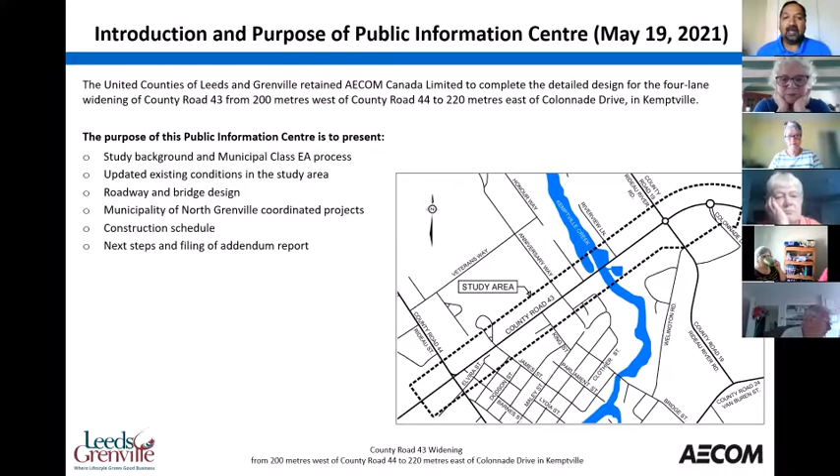What I'm going to go through today is give you a little bit about the study itself, talk a little about the road design and the bridge design across Kemptville Creek that you see there in blue, give you a hint of what the construction schedule might be, and then tell you a little bit of what's happening next.

By way of background in terms of this project, it's been going on for a fairly long time, well before 2010. There was identified a need, and we're long past, in my opinion, the need for changing this road. As I said, communities change and grow, and this road served a purpose back then as a two-lane rural road going through a community with ditches and a very rural character. But that need has changed over the years as development and growth occurred in North Grenville.

So well before 2010, the study got initiated. In 2010, what I was referring to as the Municipal Class Environmental Assessment was completed, submitted, and got approved. At that time, there was also approval to keep the existing bridge across Kemptville Creek and build a new two-lane bridge, and I'll talk about that in the next slide, a little bit about the time lapse.

So obviously between 2010, when the project was approved, and 2020, 10 years have passed. A number of conditions have changed, from an environmental point of view and a socioeconomic point of view. In accordance with the process laid out, usually when you complete an environmental assessment study report and it gets approved, that's your green light to go ahead and start construction.

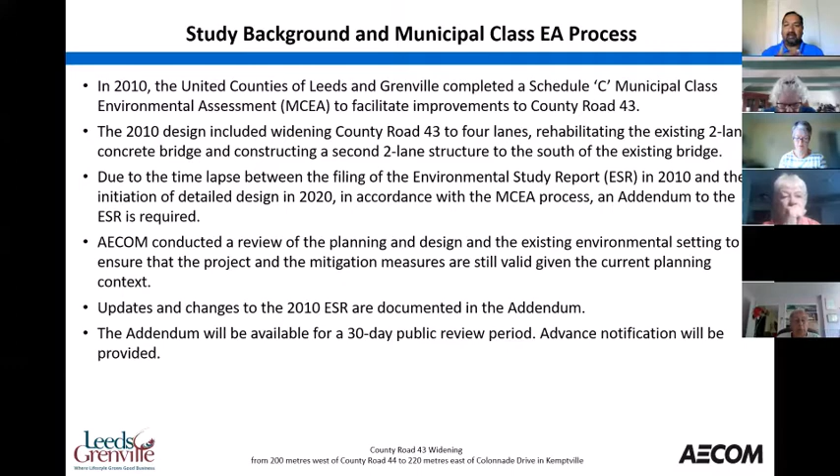And so of course, before you could put shovel into the ground, you had to do this addendum, which meant you had to document the changes over the last 10 years, go through a public process, which we did at the public meeting, and then present the results.

So one of the main things that's changed was the bridge structure at County Road, or at Kemptville Creek, County Road 43, obviously in Kemptville Creek. You're all familiar with the bridge there, right where Stinson's is.

Imagine, more than 10 years ago, because the studies, even though the environmental assessment was actually approved in 2010, all of the technical information was done a little bit before that. So you can imagine that 10 years have now elapsed between when the technical studies were done on that existing bridge, and we wanted to make sure, so we did a fair bit of investigation on the current bridge.

Including some underwater investigations. If you understand the bridge, it has piers or abutments, and those extend right down, they go underneath the water. So through the consultants, we actually went under the water, checked the condition, did a full inspection of the bridge. And not surprisingly, at the time the study was done, the logic of keeping the 2-lane bridge and building a brand new one on the south side made a lot of sense, because at that time, the condition of the existing bridge was relatively good.

And then one would have thought back then, if you'd built the project then, you would have gotten another, and we felt at that time there was comfortably another 10 years worth of life in the bridge. As you can see, it was built in 1955. Well, 10 years later, we couldn't say the same thing.

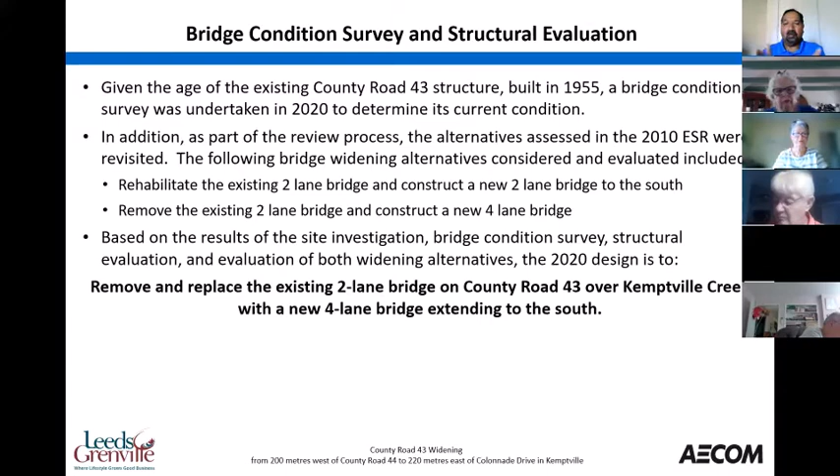That, along with a number of other changes, resulted in the need to kickstart an addendum to the environmental assessment, so we didn't have to do a whole brand new one. The process allows you to focus on the specific changes, which is why this is called an addendum to the 2010 study. I wanted to give you a good picture of what an addendum is, what an environmental assessment study is, and why we're doing it. Hopefully those slides gave you that overview.

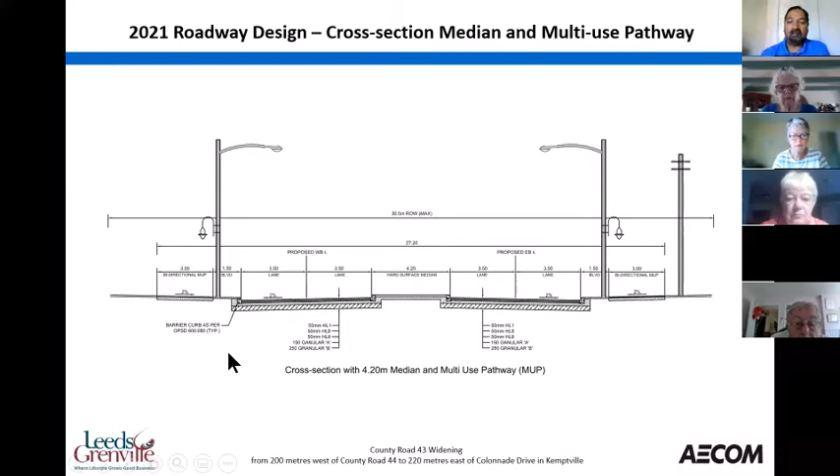As you plow a 2-lane road, you need to put the snow somewhere, and then you move this over to what we call a bi-directional facility—the term is MUP. Engineers are notorious for acronyms; it's really just a multi-use pathway, combining the sidewalk and pedestrians into one facility.

That was also an important decision—do you build it on both sides or one side? We decided it was important to make this investment on both sides. So that gives you a bit of a visual.

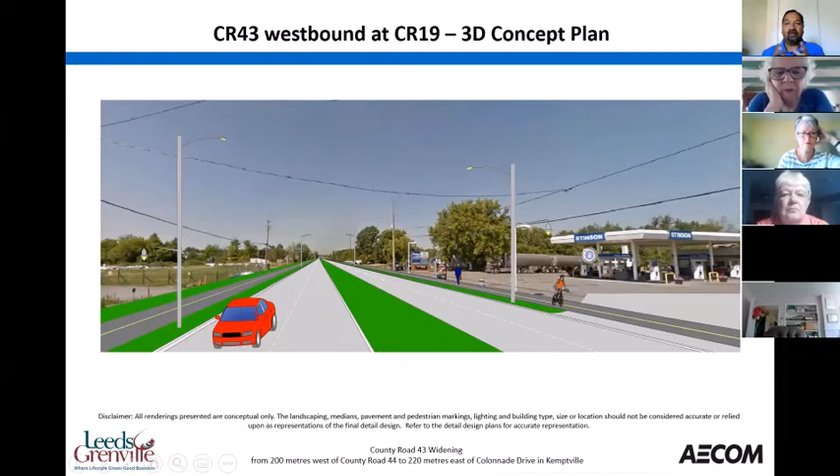There's some better renderings coming up that will give you a clearer picture. Now, another option here—across where the dairy barn is, we have a number of driveways in close proximity, with a number of businesses on the south side of the road.

Rather than having a median there, we're considering a 2-way center left turn lane at this point, so people can turn in and out of the businesses. This particular section is fairly short, from the dairy barn to the west.

Unlike the other sections, where you'll see a number of roundabouts being proposed—the intention is that even though there's a median, you'll be able to turn, go around the roundabout, and continue in the other direction if you wish. So the roundabouts play a role in providing access to those businesses.

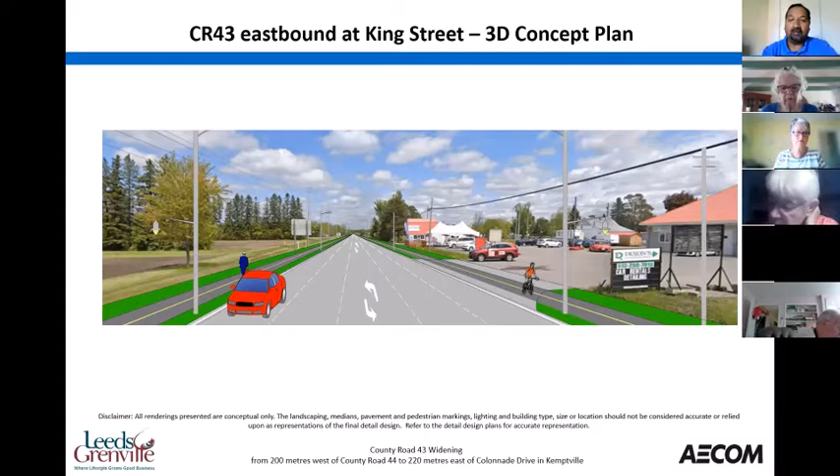In this section, because the roundabout is quite a ways down at Anniversary Way, where the Ferguson Forest entrance is, we felt there was an opportunity here to keep it open and break it up to move along. We did get some commentary about this, and hopefully I'll hear some from all of you as well as we go along.

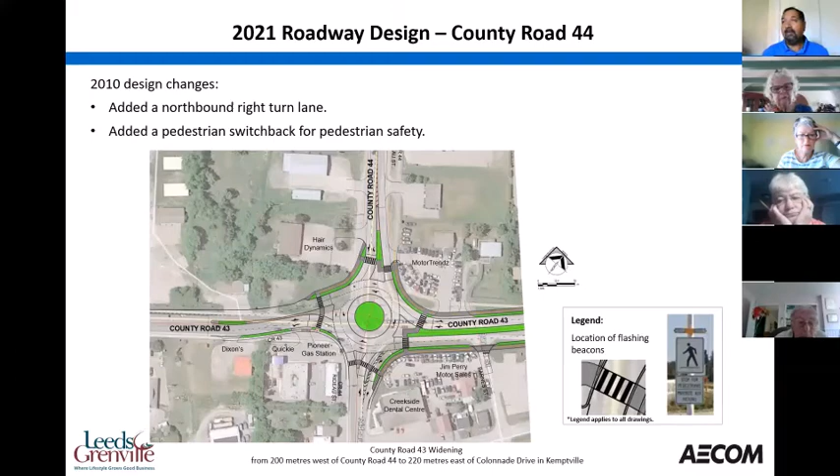Before the Class EA started, there was also an envisioning exercise done for what we want County Road 43 to look like. In that process, this was identified as a roundabout corridor, and that's why you have the roundabouts there today—there was a vision to accommodate things with roundabouts, a roundabout corridor. We've continued that vision in this next design exercise.

So this is a different perspective. Here you're looking north—Jim Perry Motors is here again, MotorTrendz is here, I think it's called Pioneer now, and there's some wonderful pizza and wings at this little place if you haven't been.

You can see how we built in these pedestrian crossings in the roundabout—this is what's known as a two-stage crossing. We put them on the main roadways, and those walls won't be nearly as high as shown here. As a pedestrian, you only have to deal with traffic coming from one direction—no left turns, right turns, nothing. You face traffic in one direction and cross the road. We've designed the switchback so that as you turn, you'll be facing the traffic coming towards you, forced to look at it, then cross another two-lane section.

These aren't shown here, but these crossings will also be outfitted with pedestrian crossing devices—like over by the municipal center, with flashing lights, beacons, and a set pedestrian signal. You press the button for traffic. Some people ask how that affects the operation of the roundabout, but as long as it's set back far enough, with only two lanes of traffic, it doesn't delay vehicles that long.

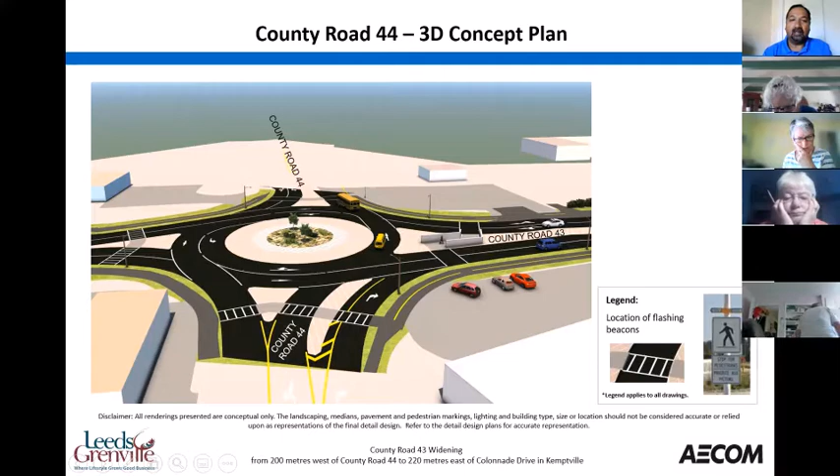So this is what I was talking about—those walls will only be about a foot high, just to provide some delineation. Whether you're walking or crossing with a bicycle, this is what's being proposed for going across the roundabout. It's a switchback design, and by providing these walls and extra illumination, you really bring attention to that intersection so motorists know what's happening there.

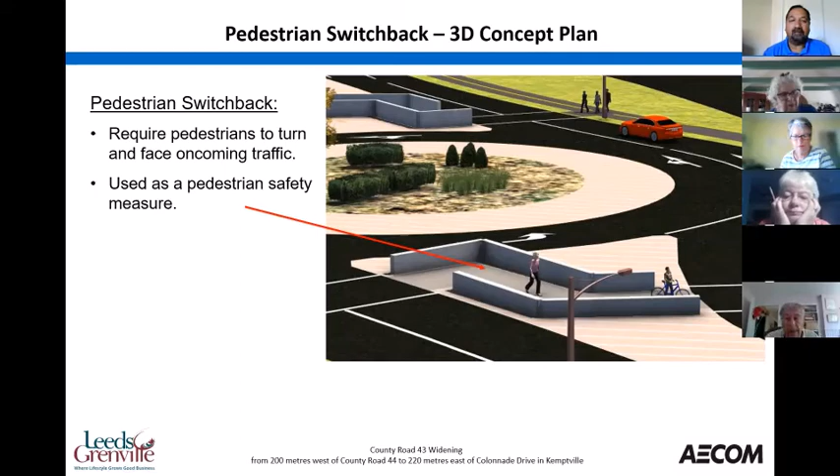So then we move on to the next intersection.

Throughout this graphic, you can see the aerial photo, so you can pick up some features in the background. You can start to see this green median down the middle, and on each end of the roundabout, in certain portions, it provides another opportunity to break up the asphalt. We're still to determine through conversation with North Grenville as to what's going to be in the middle there.

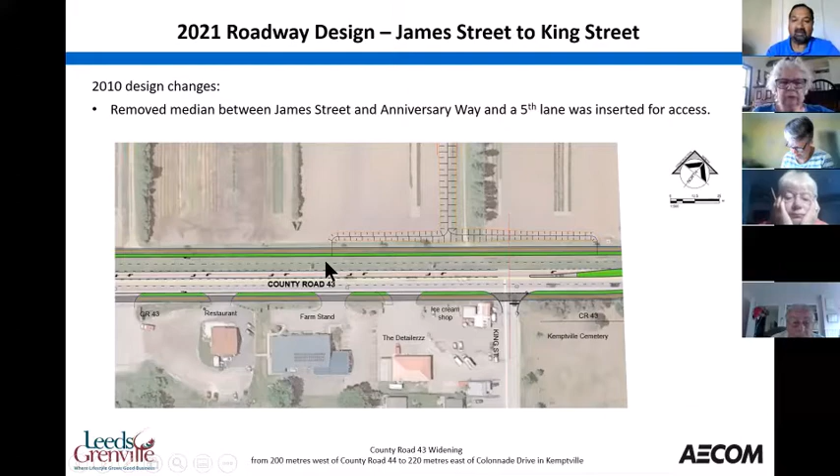So then we get to Anniversary Way. You have your cemetery right here, the Creekside Centre Plaza, the M&Ms here, I think Little Caesars is over here. If you picked up a theme of mine, it's always centered around food - I seem to know where all the good eating establishments are. So those become my landmarks, like the Dairy Barn with its ice cream and chips, et cetera. Just a weakness of mine, but we're pretty lucky to have some of those options available to us in this community, aren't we?

So here's the cemetery, Anniversary Way, and this leads into the Ferguson Forest Centre - a number of amenities up there, from walking trails, I believe there's a dog park up there, and a number of other amenities. So this was an important crossing, which is why there's this investment in the switchbacks, recognizing that you have a pretty large residential community to the south and this amenity of the Ferguson Forest to the north. So we've beefed up this pedestrian crossing here.

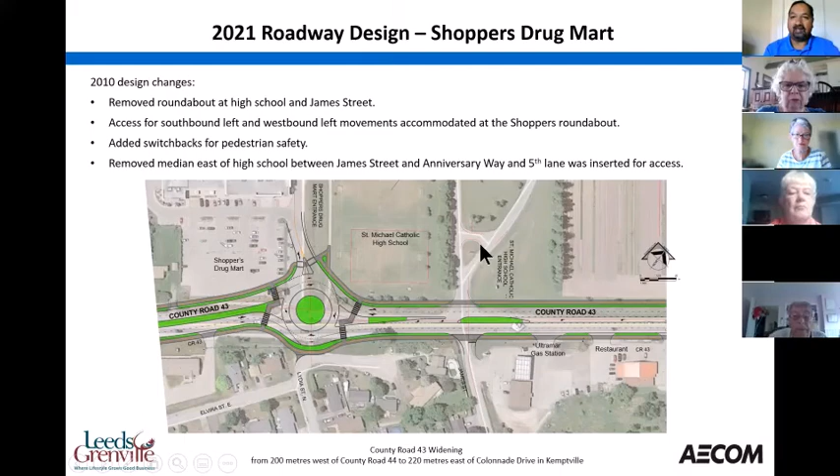I hope that answered the question. I hope you didn't mind me pausing to get through some of those questions, because they were fresh in your mind, and it allowed me to go back and explain that a little bit.

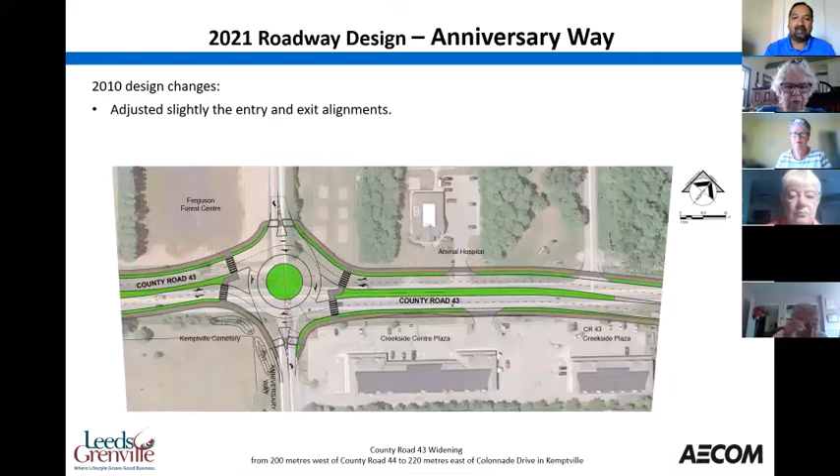We covered off Anniversary Way, which is the extension of Bridge Street - we talked about that. Then this is the Stinson entrance, aligned with the seniors home, which provided another opportunity for us where you have a fair bit of volume coming in and out of Stinson wanting to go right and left. We didn't want that to happen across 4 lanes of traffic while also dealing with people coming in and out of the retirement home. So this pulls them all together at the intersection to provide a safer movement.

And then over here you can see Kemptville Creek, where the new 4-lane bridge will be constructed. I'm going to spend some time talking about the construction of this bridge structure, because that's a common question. The beauty of doing this now is that, from a staging point of view, the existing bridge will remain, and a brand new 4-lane bridge will replace it.

The way that gets done is you build the south 2 lanes of the new 4-lane structure, and divert all the existing traffic onto the new bottom half on the south side. Then you close down and tear down the old bridge, and build the north half of the 4-lane structure. So at all times, the beauty of doing it this way is you can build half the bridge, divert traffic to that side while still using 2 lanes, then build the other half of the bridge, and open it up to 4 lanes.

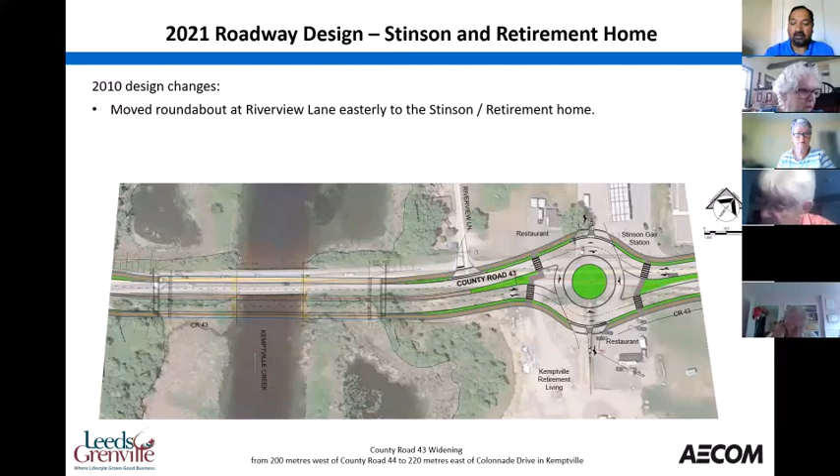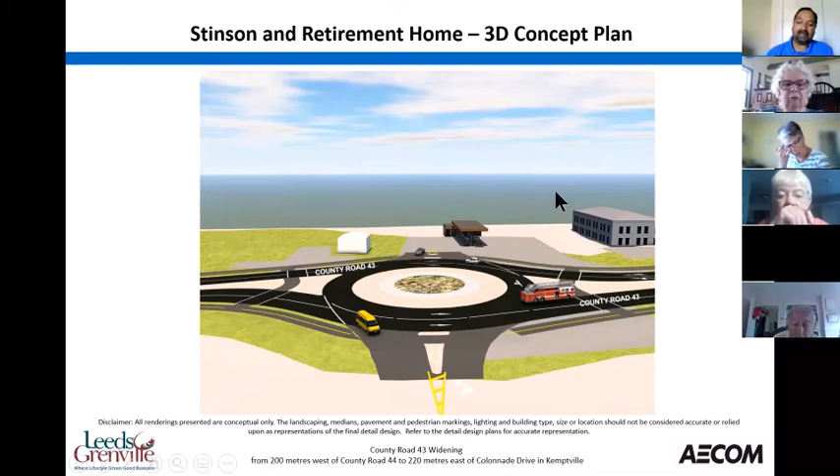I talked about this roundabout already. There's your representation of Stinson's, and this is your retirement home here. Of course, we haven't fully shown what the landscaping is going to look like in this roundabout. We have a fair bit of time to figure that out.

Moving further east, you have County Road 19. Here you have the McEwen gas station, Giant Tiger, KFC, the new Starbucks, and the brand new building going up on that pad right now, or that's actually been constructed. So here, again, this is an existing roundabout. We're modifying it to bring it up to 4 lanes, and then modifying these radiuses.

Now I want to talk about that aspect, because a common comment I hear from people is that traffic is going through the roundabout too fast on 43, and as a person coming in off the side street you have to wait a long time to get into it. The way you manage that is through a specific design feature: the speed of the vehicle coming in, controlled by the angle of deflection coming into the roundabout. If you observe it right now, you don't have much of an angle coming into the roundabout, so you can comfortably go through probably at 40 kilometers an hour, sometimes 50, if not higher.

So through this exercise, when we modify this, you can see there's a bit of curvature identified in the road itself—you dip down and then turn right. The bigger this deflection and angle is, the slower you have to go to negotiate the roundabout. With this new modern design, we're changing those entry paths significantly, not just leaving the roundabout alone. We have to change that entry deflection, and it's not just a matter of dealing with the median—sometimes you have to deal with the alignment of the road and change that coming in so it's very pronounced. By doing these things, you slow down traffic coming in on all the approaches.

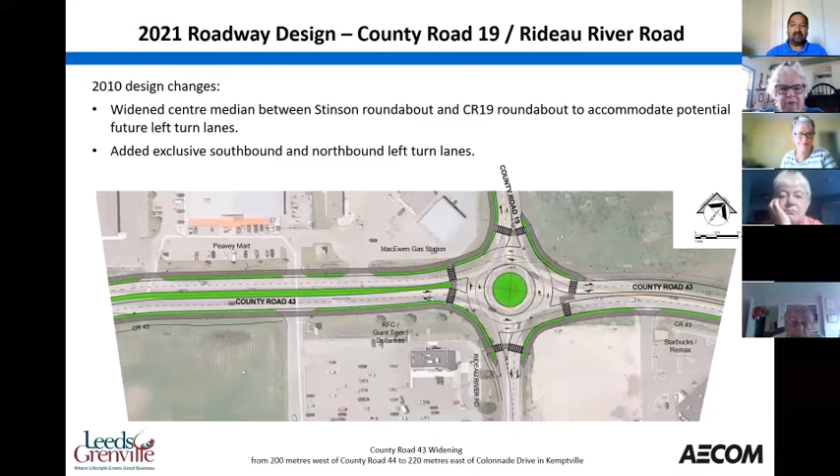When the traffic on 43 has to slow down, that provides more of a gap and an opportunity to enter into the roundabout. This isn't a new novel concept—it's been tried and tested in many municipalities with much higher volumes than you'll see here. So that's the plan on how that's going to work. And then that's a 3D visual.

You see the MacEwen on the northwest corner, and then there's the KFC building there, shown there, and this is the 3D you can see of the roundabout.

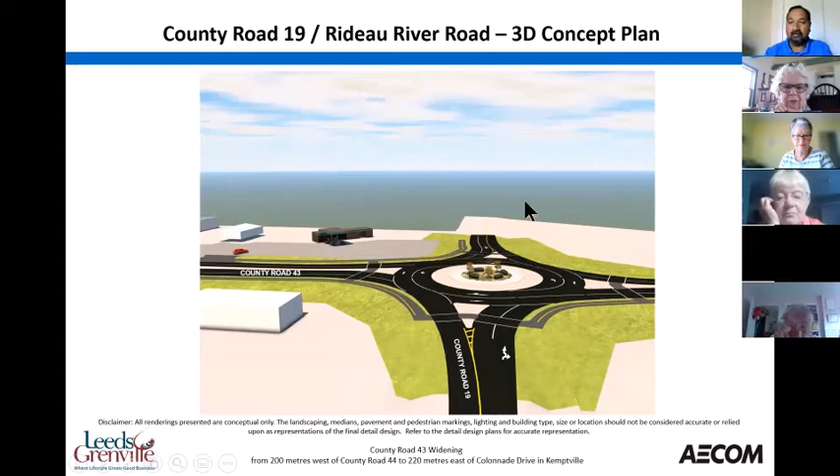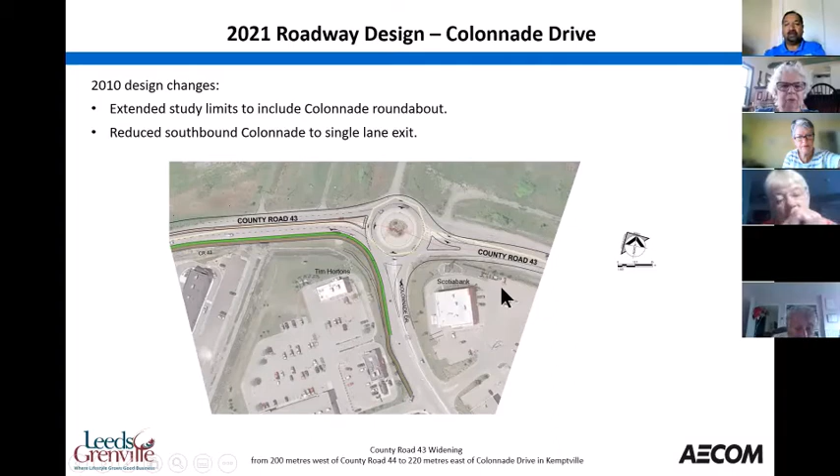And then that brings us to the east end of the project at Colonnade. In this diagram you don't see it, but we're actually making modifications further to the east to modify the radius of vehicles coming into the roundabout and entering into the roundabout itself. So that gives you an overview, and there's a 3D of that roundabout, again looking fairly sparse in this rendition.

But we'll be working with the municipality to look at that as well. So before I go further, I'm going to switch and try to show you a nice video of what you've just seen - a little flyby, driving through the animation. Let me cue that up for you.

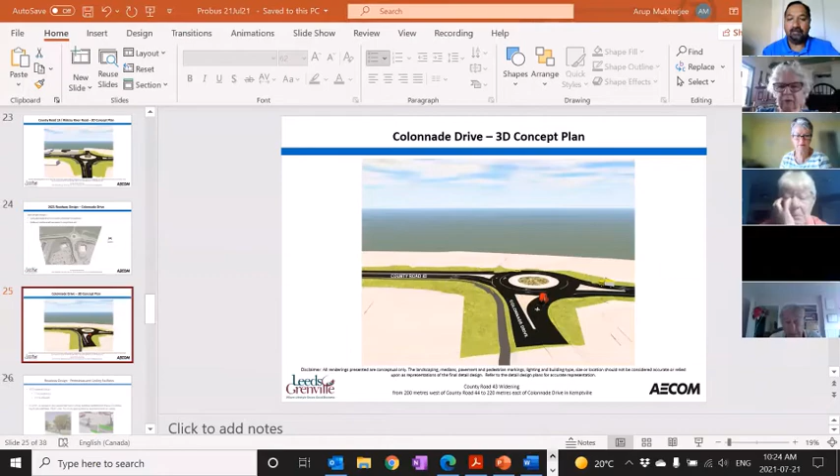So does everybody see the image there, a 3D image of that? And I'm going to run the video.

I'll stop at a certain point, but here, just to orient you, we are starting at the west end of the project, just west of County Road 44. To orient yourself, the Pioneer gas station here is, there's Jim Perry Motors, and you're looking east, towards Kemptville Creek over here on the horizon.

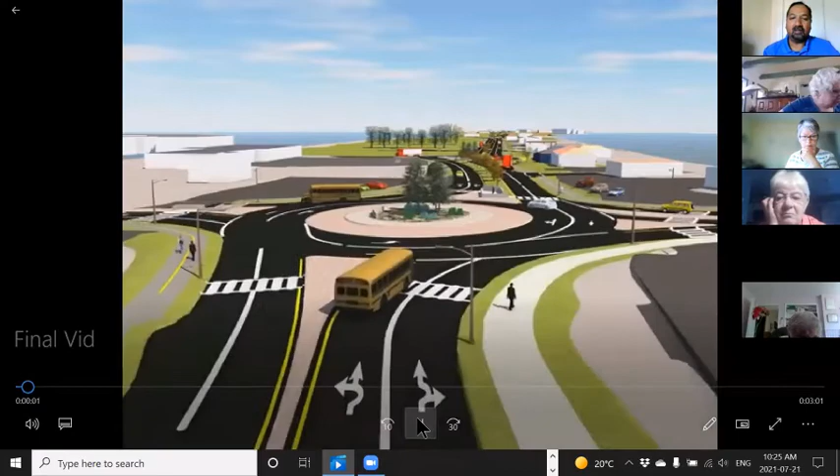Let's run the video, and I think you'll find this provides a really nice visual of what this will look like. So here you are - you can kind of see, whether it ends up looking exactly like this or not, some of the landscaping that is being proposed in the middle of the roundabout as we go through.

I want to pause there - this is another visual of the pedestrian crossing, what we call the two-stage crossing going through there. And then we're moving on.

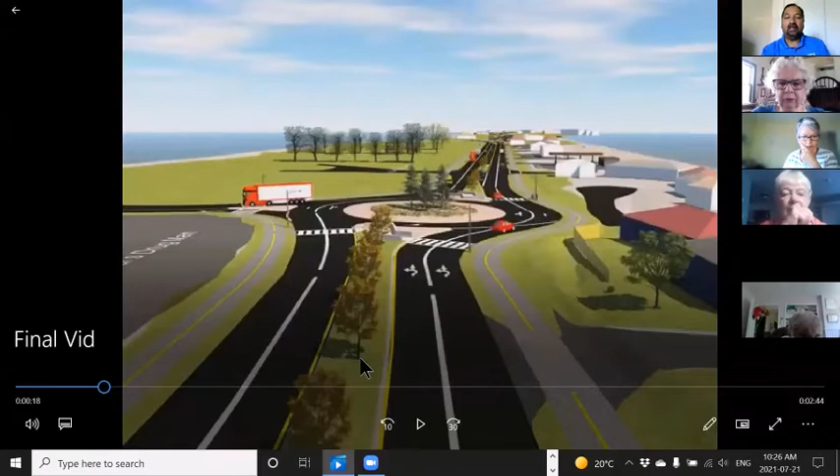We're coming up to the Shoppers Drug Mart roundabout. Again, I want to point out the beauty of having these center medians is to be able to accommodate the landscaping - there's a vision to provide tree planting and landscaping down the center of this median. It disappears in the section where the businesses are east of here, but then it picks up again.

Again you can see some of the landscaping, giving a bit of visual coming into the Shoppers entrance - the Shoppers entrance is to your left. Going through, you see the switchback pedestrian crossings, and some of where there's an opportunity - we always try to break up 4 or 5 lanes of asphalt to provide it.

And here's what I was explaining - there was a question about how the high school works. You can turn left here, but if you're coming out of the school, you'll come here, turn right around the roundabout, and continue east along that way.

That I believe is the other gas station - I think it's Ultra, I'm not sure. Ultramar.

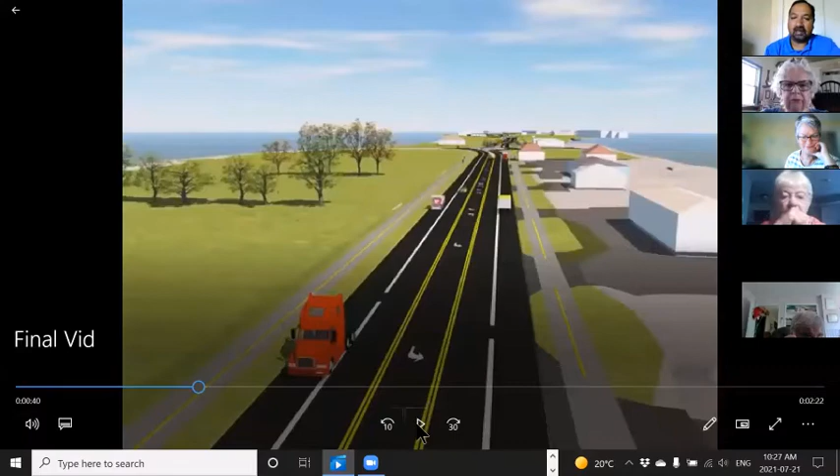More landscaping you can see in the middle here. And this is where I was explaining we had this two-way left turn lane to allow people to come in and out of these businesses that are very close to each other, have a number of driveways. As you can see, if there was a median there, you would have to go all the way over to Anniversary Way to turn around and come back. So we're trying to provide for that.

Pay attention - this is where we have the multi-use path on the north side being shared by pedestrians and cyclists on both sides. We didn't put it in here, but there will also be landscaping in this boulevard - plantings and trees that will be planted here.

Right now we're coming up to Anniversary Way, or this is where the cemetery is again, and this is getting you into Ferguson Forest.

You can see again the switchback left turn lanes that are being designed here, and more landscaping in the middle to provide that greenery.

And then the median narrows as we get to the new bridge structure. We didn't want to spend the money to have such a wide structure because bridges become extremely expensive as you start to increase the width. So we narrowed it coming across the bridge - you just have a narrow median for the separation of traffic and safety. The pedestrian and cycling facilities will continue on both sides of the bridge to bring you across safely.

And now we're approaching the seniors' home on the right side, and then Stinson's gas station on this side.

Switchbacks. There's an interesting discussion here. We haven't quite worked out the details of the crossing on the east side of this roundabout. We've been made aware that there is a snowmobile path that comes in here, and riders often get across to Stinson's to gas up, so we have to think about how we're going to handle this.

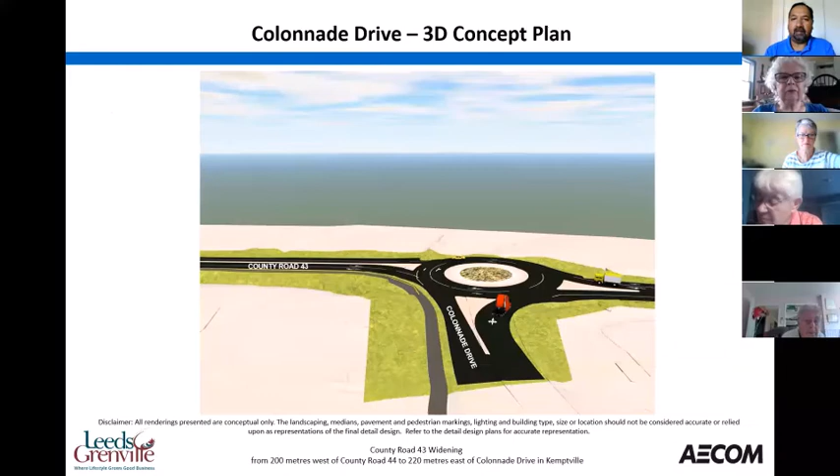Oops, sorry. All right. We kind of went through a couple of other things - where did we end up here? Okay, I want to talk a little bit about a couple of other features. Am I still good on time? I've been going at this pace, but are we okay with time?

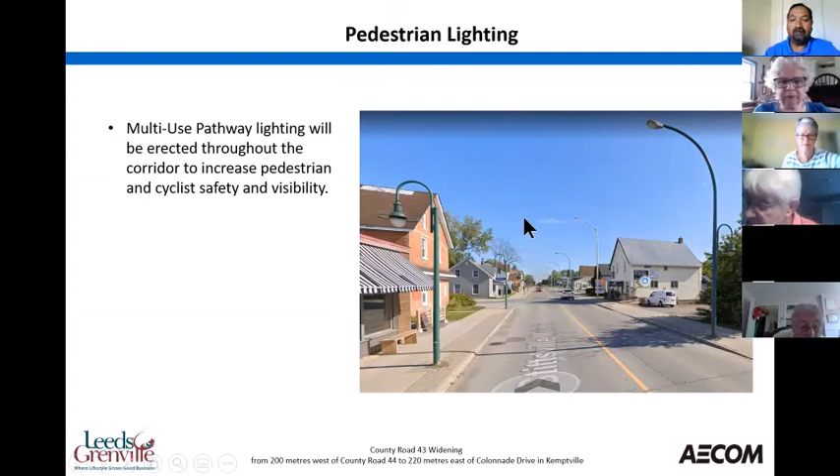Pedestrian lighting is something that we've done. You can see there's pedestrian level lighting planned here in addition to the roadway lighting. These will be decorative, designed to fit in with the community. I talked about the medians already, and this is an example of other places that have already done it.

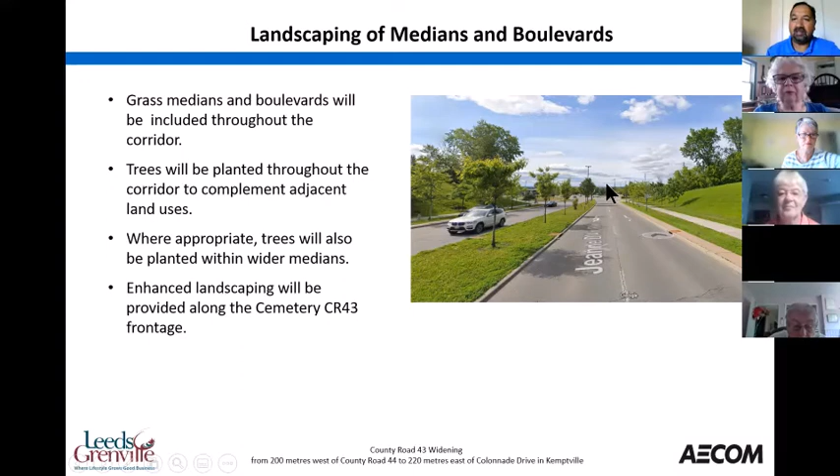There's some decisions about landscaping that will still occur, but the intention is to start planting trees in the middle, and you can see that in the middle and in the boulevard along here. We talked about landscaping in the roundabout, which is still to be determined. Somebody asked me to replace this with a better image, which I didn't do, I guess.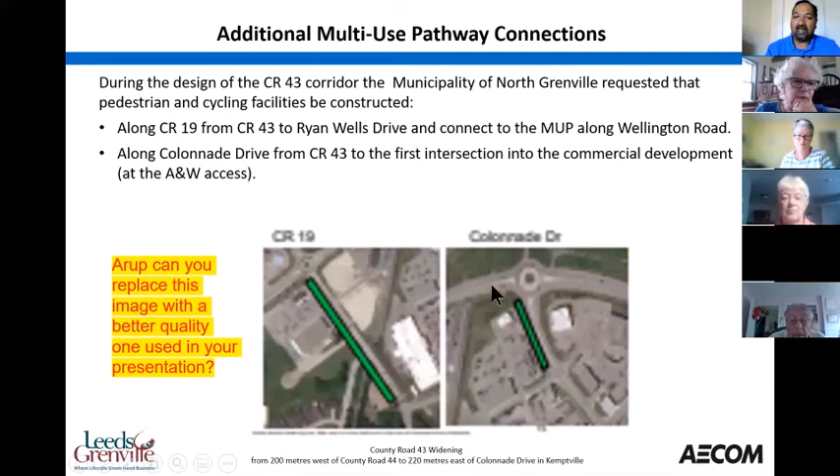But there are a couple of sidewalks that we're going to extend. This one is County Road 19 - there's a Giant Tiger, a lot of residential community here, and a pathway, a trailway that comes into here. So when we do this project through North Grenville, we're going to extend a sidewalk right down to Ryan Wells Drive. And over at Colonnade, we don't want to leave people stranded, so there's a sidewalk there today, and we're going to extend the sidewalk down from County Road 43 down to those locations.

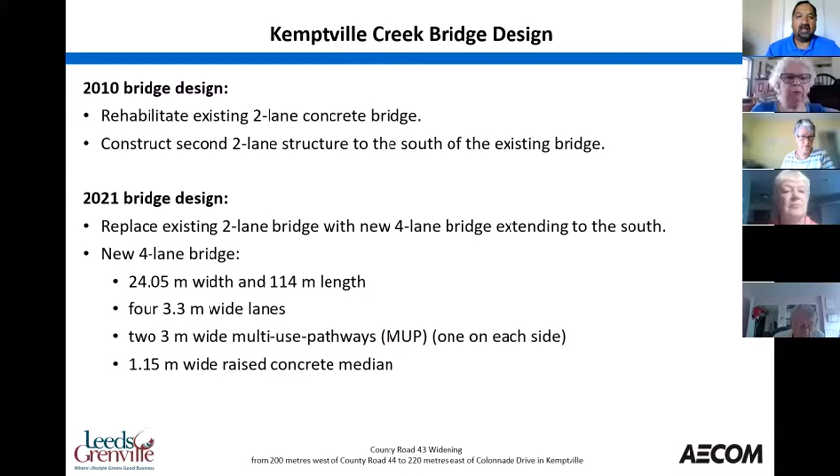And I already explained the bridge and the decision about why we went to a 4-lane structure, so we'll cover that off. That's done - I've already presented the 3D video to you.

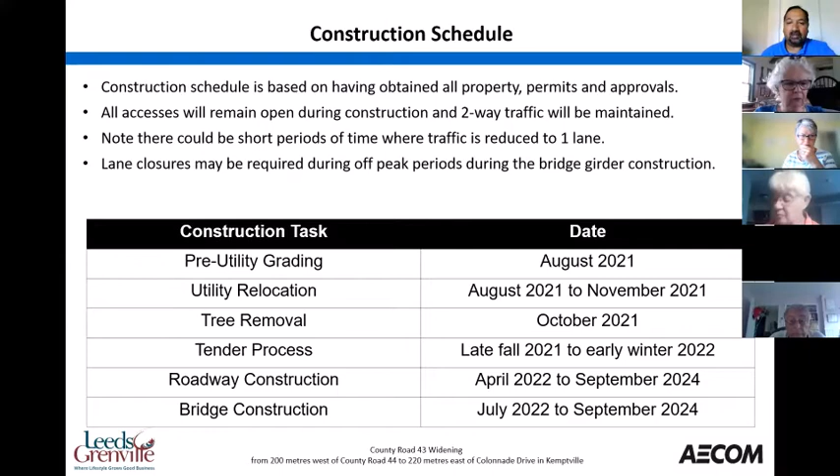And a rough schedule to finish off the discussion. We're working with the utility company, so you're going to see some action out there, hopefully later this summer. With the utility requests, all the hydro poles have to move, Enbridge Gas has to move, Bell, Cogeco - there's a huge undertaking which will start this fall, late summer, and move on. There's some tree removal that has to occur outside of the bird migratory window, so that'll occur in October. The tendering process will start late this fall, hopefully awarded in early 2022. Start construction in 2022, and the bridge construction will continue.